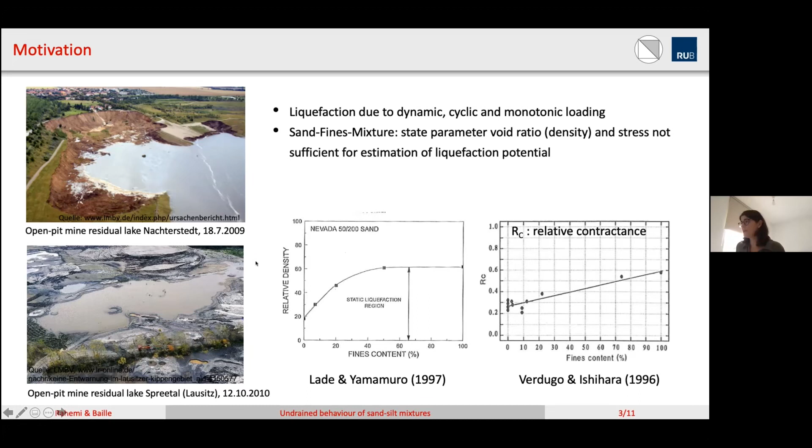As it was already shown in former publications, there is a significant effect of fines content on the liquefaction behavior, and we have this in the case of dynamic or cyclic loading on the soil and also monotonic loading. I think we know a lot of cases where liquefaction is triggered due to earthquakes, so cyclic and dynamic loading, but this is not the case here in these two examples, since this region is not prone to seismicity. So the source is what we call static liquefaction, or maybe some trigger due to earthworks or artificially induced cyclic or dynamic loading.

So this is a slide just to illustrate the framework in which we are moving in this study: the concept of critical state and the different types of behavior depending on the initial density of the soil. So usually we have two very distinct mechanisms, which are the dilative behavior, which we can observe in the pore water pressure, which is firstly slightly increasing, but then decreasing. And on the contrary, we have the contractant behavior, where the pore water pressure is continuously increasing until the soil will liquefy. There's also a kind of intermediate mechanism which occurs at an intermediate state of these samples, where the soil is first contractive and then dilative, and this mechanism is also called limited liquefaction.

So on the right side, we see the stress paths corresponding to these three mechanisms, and the orange path, the continuous decrease in effective stress, is representing the liquefaction mechanism. The so-called instability line is defined by the inclination of a line which goes through the peak point of the measured deviator stress during the liquefaction path. And at the end of the deformation, when we have large deformation and no further stress change or pore water pressure change, this state is the well-known critical state. So based on this concept, in the void ratio effective stress space, there is the definition of the state parameter psi null as the difference of the initial void ratio of the sample to the critical state line.

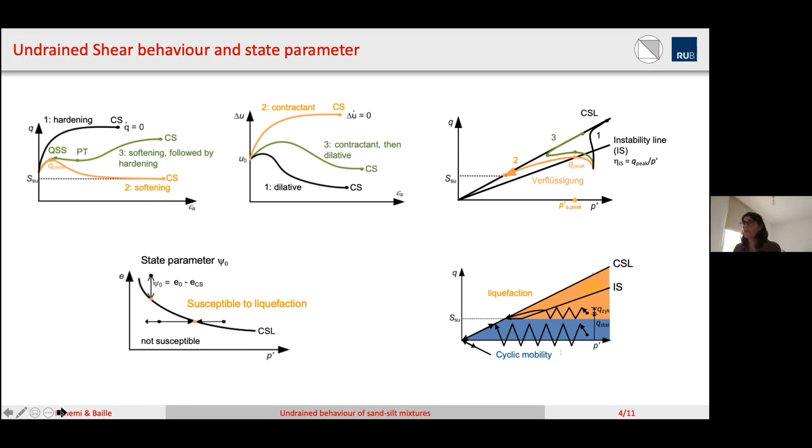So what is shown here is an example of triaxial test results, both cyclic and monotonic, of typical sand from this open pit mine area in the Lausitz area. In English, it is called the Lusatian area.

And what we can see here is when we have a cyclic loading of a sample in an initially loose state, we see here the deviatoric stress or pore water pressure. So the blue line is the pore water pressure, the red line is the measured deviatoric strain, and the black line is the applied cyclic load.

So this special sample failed after 23 cycles of load, and in the deviatoric stress versus p' plane, we see here the behavior, and we could observe that the failure or the liquefaction of that sample occurred at the point where this instability line was reached, and it completely failed. So we see that the deviatoric stress was essentially above the range of the residual strength, and that's why the sample liquefied when the so-called instability line was reached.

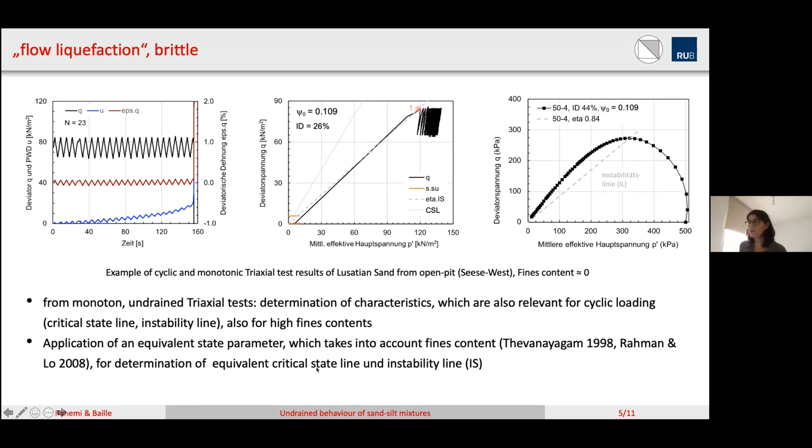So what was the material in the work of Negar Rahemi? She performed about 50 triaxial tests, which were mainly isotropically consolidated and undrained. And here in this diagram, you can see the void ratio e over fines content FC for the different mixtures which she has tested. The grain size distribution is shown here on the right side.

She prepared different mixtures of Hostun sand and silt, where you can see the microscopic pictures as well. And the fines contents chosen were 0%, so pure sand, 10% fines content, 20, 30, 40, 50, and 100. And these are the corresponding grain size distributions of these mixtures.

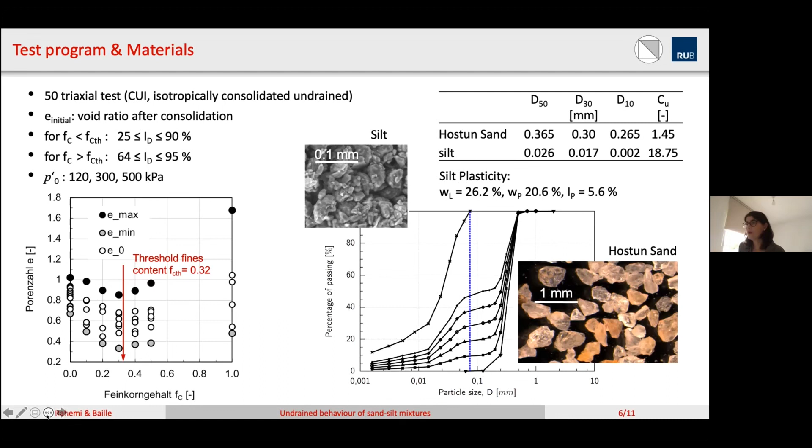So when we summarize results, we can check whether the samples behave according to the well-known critical state concept. So we have plotted the mean effective stress on the vertical axis versus this state parameter psi 0. And here you see the different results. Black symbols show the result of the pure sand.

Red symbols are for the 10% and so on. And what we can observe is that in case of all fines contents, all samples have shown the liquefaction stress path or liquefaction behavior when the state parameter was greater than 0. So the results qualitatively fitted well to the concept.

What was further observed is that for the fines content 100% and the initial state parameter greater than 0, the liquefaction occurred despite the dense initial state. And for the region of fines content between 0 and 0.5, in a few examples, we have observed the so-called limited liquefaction when the initial state was around the critical state line, so psi was approximately 0.

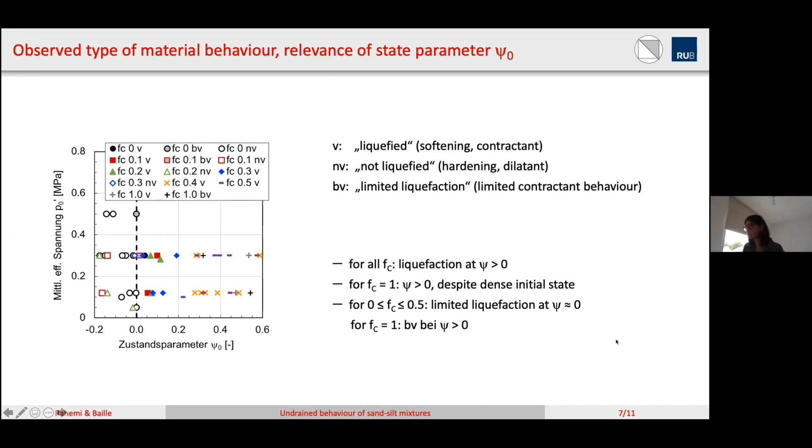Now we have plotted the results separately for the different fines content ranges versus effective stress, and also in the stress plane q-p'. And what we see, as was also already observed by others, is that in the range where the coarse grains are dominant, the critical state lines move from top to bottom with increasing fines content.

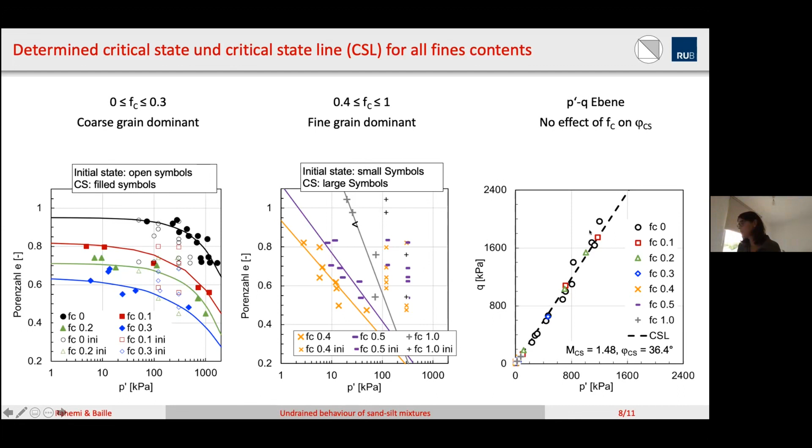And for the fines content range larger than the threshold value, so in the range where the fines are dominant, we see different linear behavior of the critical state line. In the effective stress-deviator stress plane, we can see no effect of the fines content on the friction angle at critical state.

So in this slide, it is shown what is meant by the region dominated by the coarse fraction or by the fines fraction. For the quantitative application to calculate an equivalent void ratio, these two cases inside the red frame are considered. And in this case, we see that the contribution of the fine grains to the load transfer is partly there. So some of the fines can contribute to the load transfer and some cannot.

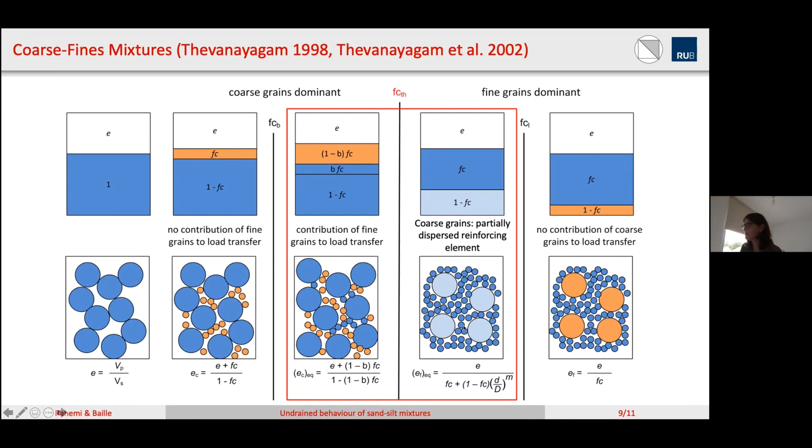Whereas here, the assumption is that the coarse grains are inside a matrix of the fines, and they will somehow reinforce the whole soil matrix simply by their presence, even when there is not always contact between them.

So according to these two assumptions, the critical state lines are normalized for these two ranges of fines content. In the first case, where the coarse grains are dominant, we apply this equation to calculate the so-called equivalent void ratio e*. And this number b is a factor which quantifies to which extent the fines contribute to the load transfer inside the whole soil matrix.

And this factor can be determined differently. There's one suggestion by Rahman et al. to calculate this b value as a function of fines content, the threshold fines content, and also a factor R, which is a ratio of D50 of the fines and D10 of the coarse fraction, and two other parameters k and mu. Or the second variant, which was applied in this study, is to look for the best fit of b for the case when we have the least deviation of all points from a normalized critical state line.

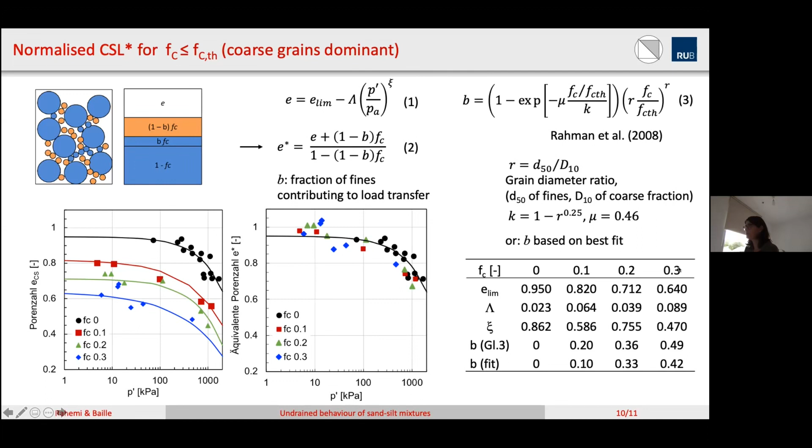So you can see here the parameters b determined by these two methods, and the other parameters describing the shape of the critical state line in the e*-p' plane, which were determined for the different fines contents. And then we have the other range for fines content higher than the threshold value.

And here another approach was applied, where the factor m signifies the measure for the reinforcing effect of the coarse grains inside the fines matrix. And the data allowed us to apply this equation, and we could find parameters which resulted in a normalized critical state line.

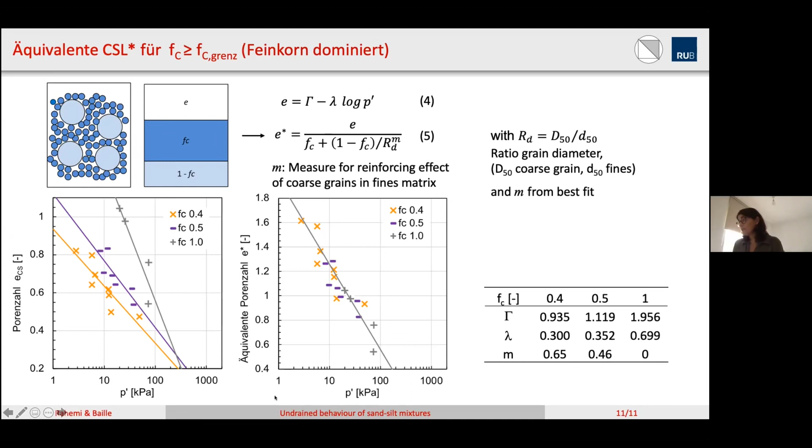So the sense of this normalization is that using this equation, you can calculate critical states for samples with any fines content, without the need to determine them experimentally before. Otherwise you would always need to determine all the critical state parameters for any fines content to be able to predict something. But once you have normalized the critical state line in terms of e* and found an equivalent void ratio which takes into account the fines content, then there is, in theory, less need to determine experimental parameters.

A further use of this concept is that it was suggested to predict the instability ratio, so the stress ratio eta_IS at the peak point of instability in the undrained liquefaction path, as a function of the initial state parameter psi_0.

And here we can see that again there is quite a good relationship for this mixture in the lower fines content range, but for the higher fines contents we cannot find a relationship where we can state there's a nice fit of all the data in terms of the functional dependency of the stress ratio eta on the state parameter psi.

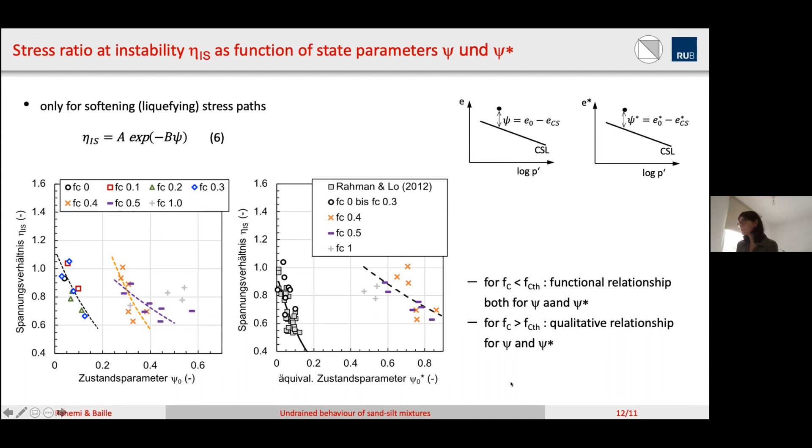So with this, I am already at the end of the presentation, and I will summarize that it was clearly shown that the fines content affects the critical state line in the void ratio-stress diagram, but no effect on the critical state friction angle was seen in the p-q plane. The normalization of the critical state line is possible separately for the coarse grain and the fine grain dominated region. And for further work, one can ask oneself what are the physical parameters which affect these somewhat empirical values of b and m.

So how they can be justified by some physical meaning. So in the prior presentation, we have seen nice slides about the effect of shape, for instance, or surface roughness. So for sure, all these mechanisms probably play a role in this behavior here.

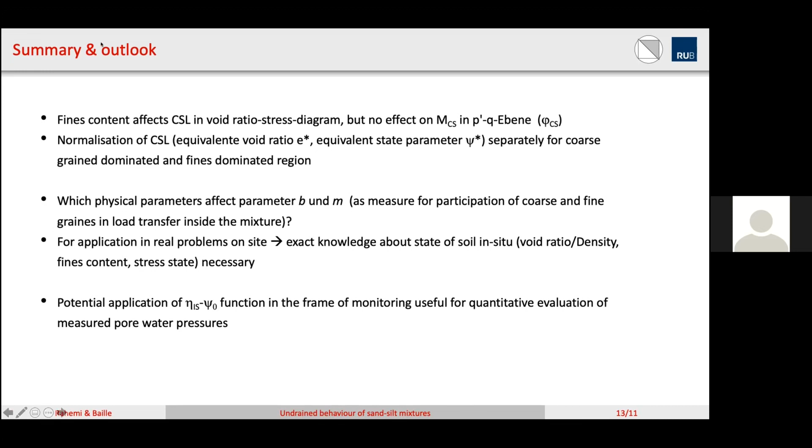Yes, thank you so much for this very deep lecture. I would like to ask one question, and I would have one comment. For the comment, I would like to show something on the screen, so I would like to ask you to leave the share position. Probably yes, I managed to share.

So my question is: was this instability line defined by yourselves in your study, or is this a well-known concept? No, this is a concept which is already established. Okay, thank you. It was very interesting and very nice. I am so happy to have this presentation.

And I just would like to mention this picture. A long time ago, I was once in Bochum, and you gave me some data from the results of Negar Rahemi. And I represented this data in the grading entropy theory, in the grading entropy diagram. I am not sure that everybody is familiar with this diagram. So in the upper line, you can see the grading entropy diagram and the internal stability on grain structure

stability criterion of Lőrincz. According to Lőrincz, a mixture can be stable if the relative base entropy parameter A, which is on the horizontal axis, is larger than 2/3. If it is smaller than 2/3, it can be unstable. And there is a transitional zone, nearly a triangle, which is valid for larger uniformity coefficients if there is a wide grading curve.

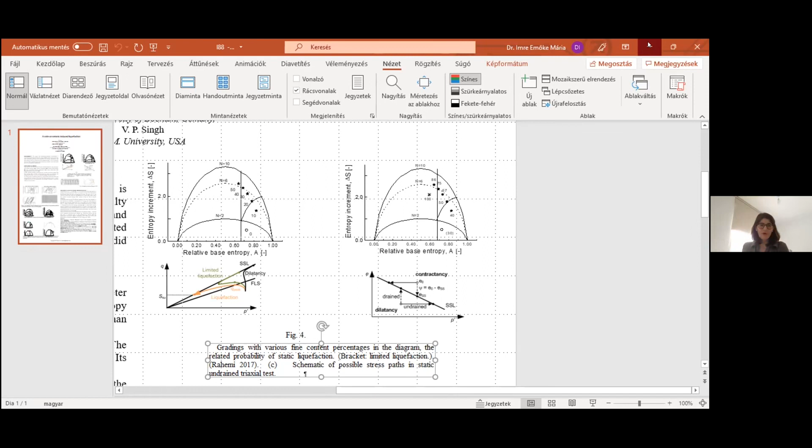Okay, yes, so of course we are open to use the data for your concept in terms of entropy, and I would be very curious to see how this works in detail.

Thank you. And just one more comment: we recently made a report for TC 201 about river dikes, flood levees, and we also found the liquefaction phenomenon extremely important. So this could be another collaboration, at least for this very small problem. I will send an email about this if you don't mind, so we can use your very nice research results in this research also.